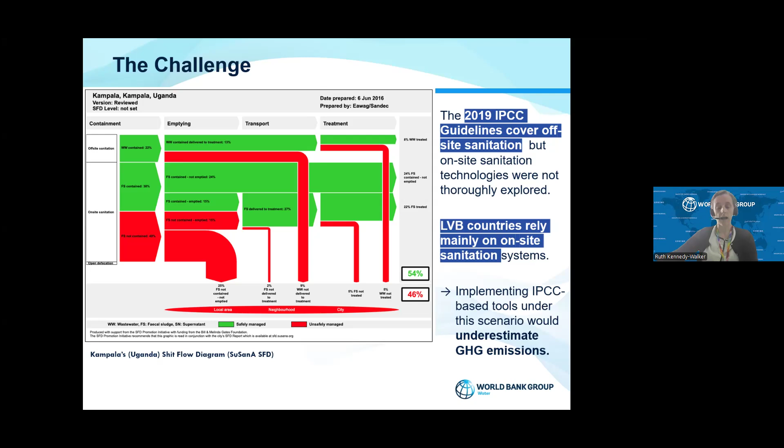So what we found is the current tools were basically underestimating GHG emissions, especially for those countries, like the riparians I mentioned, that are highly reliant on on-site sanitation. Next slide, please. So we wanted to develop our own tool.

So we partnered with a firm called Climate Focus to develop a tool that would obviously rely on the information from IPCC, but also include other data, more recent data, to get a better estimation of GHG emissions across the sanitation service chain and for both on-site and off-site sewage systems.

So we started with the input data. In some of the towns around Lake Victoria, the SFDs were available, which provided data. And then in those that didn't have the SFDs available, we did a rapid assessment. So we actually did a baseline sanitation assessment for 44 settlements to show the current sanitation situation.

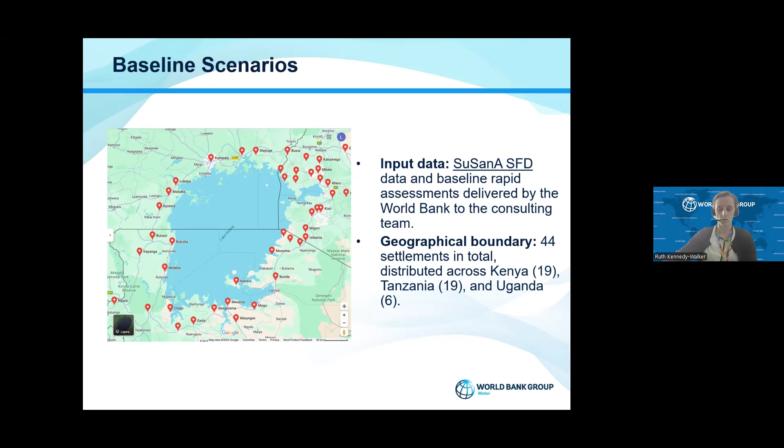Next slide, please. Then we developed the model. So as I mentioned, we built on the 2019 IPCC guidelines, but complemented with more up-to-date peer-reviewed literature. And we were trying to see the categories of emissions you can see from the table there across the sanitation chain and for both on-site sanitation and sewage systems, and both from direct or operational.

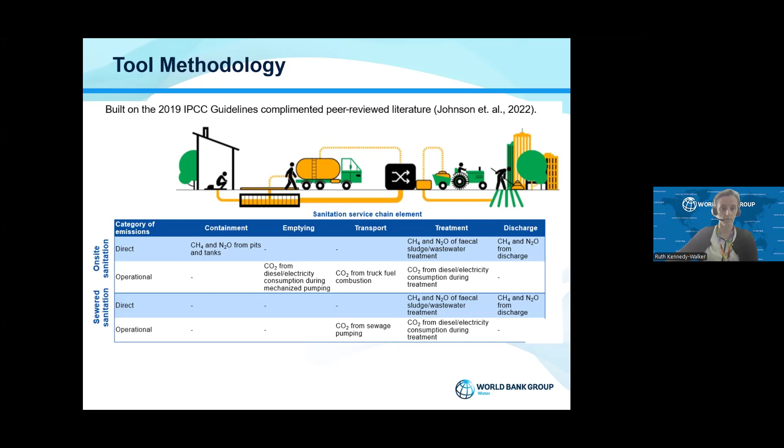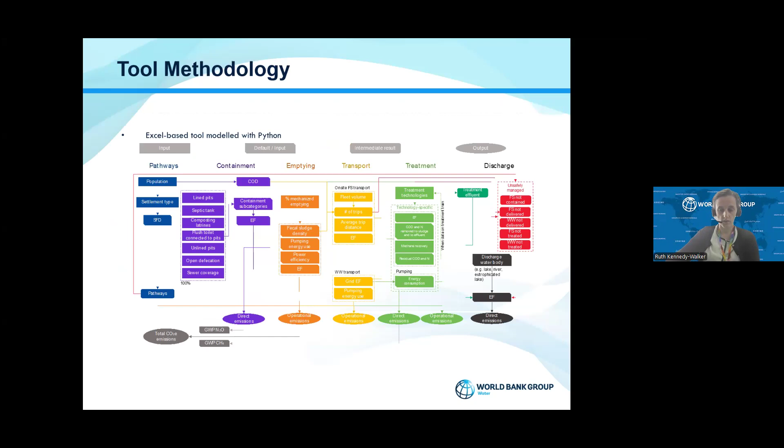Next slide, please. Obviously we have a very short amount of time to discuss, but this is a screenshot from the Excel-based tool model, which is based in Python, and shows you across the different pathways and across the sanitation chain the type of elements that were being looked at to get the GHG profile. Next slide, please.

Sorry, back one, thanks. So then we worked to come up with an output interface on the model, which, this is obviously a snapshot, basically highlights the total emissions across the 44 settlements. It identifies the top emitting settlements, which you can see. Then it looks at where across the sanitation service chain the highest emissions are coming from, and whether it's coming from safely or unsafely managed.

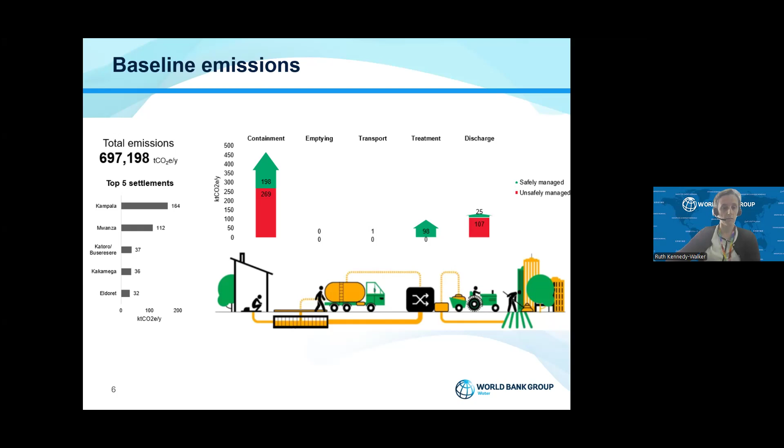And this is obviously the baseline. So this is the current situation. And the idea is to be able to help government counterparts, practitioners, and the World Bank to identify, if greenhouse gas emission reduction is the priority of a project or a key element, where across the sanitation service chain they should be focusing, and maybe even geographical locations.

So as I mentioned, when we started out, we wanted to do the baseline scenario and then also go one step further and input potential future interventions and see how that would impact the GHG profile for each city or across the country as a whole. But unfortunately, we ran out of time and funding to do that. So we ended up just doing the baseline scenario for the 44 settlements.

But I think overall it was still a successful outcome because we were able to get a better estimate of the greenhouse gas emissions using the more recent literature for countries where there's more reliance on on-site sanitation than sewage. The model allows us, as new literature emerges, because there's a lot of research going on at the moment on this, to input those parameters and update the model. As I said, it's a good model to look at the main intervention stages across the sanitation chain.

This was the first development of the model, and we're now looking to utilize the model in a new project in Indonesia. I'll talk a little bit more about that later if I have an opportunity. And we will do the second phase. So the baseline, and then in Indonesia, we'll actually look at how proposed interventions would change the greenhouse gas emission profile, and that will impact the project design and what is actually being constructed, or the service delivery model that is going to be used across the sanitation service chain.

So before I start my presentation, I want to put a question out there. When you think of the toilets that you see in your work, whether they're in rural areas or urban areas, what proportion of them do you think are climate resilient? Is it 50%, 20%, or maybe not any of them are resilient? You can keep that to yourself, but I was asking this because one thing I'd like to get across in this presentation is to get us thinking about what would it take to make a sanitation technology resilient. Next slide, please.

So my colleagues and I at the University of Technology, Sydney, have been thinking about this, and we developed something called the ClimateFIRST tool, which is a 5-step process to help sanitation technology developers think through how to make a sanitation technology more resilient. And before I go any further, I want to highlight that climate resilient sanitation is about much more than technology. It's about institutional arrangements, financing, regulatory frameworks, lots of things. We're not going to just engineer a toilet that will solve for climate change. But technology is an important part of the equation, and that's what we're zooming in on here in this tool.

So the tool itself is an Excel-based process that helps the user think through how different climate-related hazards might affect a particular sanitation technology, and how we can reduce the risk of those hazards through improved technology design. The reason why we might want to do that is, as we know, climate change is heightening the climate risks that technologies are exposed to, and we want toilets to perform better in an era of climate change. The tool can also be helpful in comparing different types of sanitation technologies if you were to do an assessment of two different technologies and then compare them side by side.

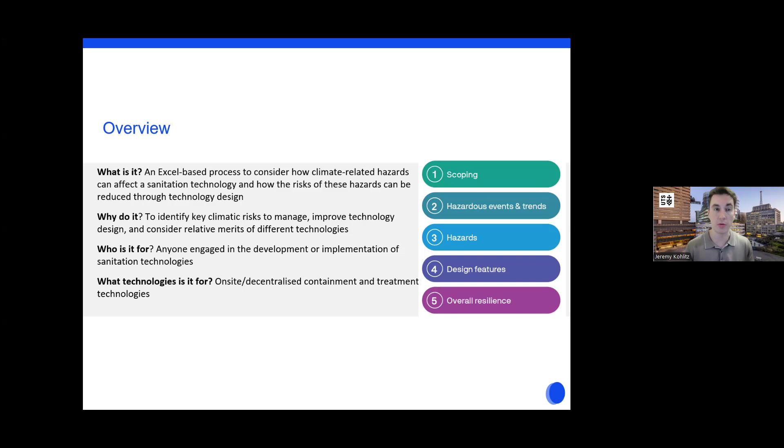So it's for anyone that's involved in the design of sanitation technologies or their implementation. That might be a developer that's coming up with designs or an implementer that's making choices about which ones to implement. And finally, when I say sanitation technologies, I'm referring to non-sewered, on-site, decentralized containment and treatment technologies. So not referring to sewer networks and wastewater treatment facilities. Next slide, please.

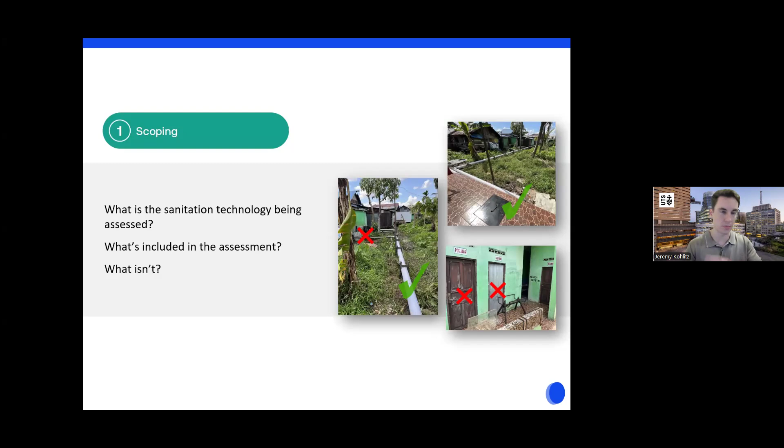So the first step of the tool is to decide what is the sanitation technology that you're assessing. In this example, these are some photos from DEWATS in Indonesia. And you might say, well, we want to assess the containment unit part of the technology, and we want to, for example, assess the main sewer line here. But we don't want to assess all the household connections because maybe we don't have control over that. And maybe we don't want to assess the superstructure because as a developer, I don't have any control over what the community constructs as a superstructure. So I'm excluding that from my assessment. Next slide, please.

The next step then is to decide which hazardous events and trends are relevant for your area. So the ClimateFIRST tool supports an assessment of 8 different hazardous events and trends that you see on your screen. And you might choose that you're just concerned with floods or droughts. Or for example, if you're in a landlocked country, you're probably not too worried about high sea levels. So you would just pick the hazardous events and trends that you think are relevant for your technology.

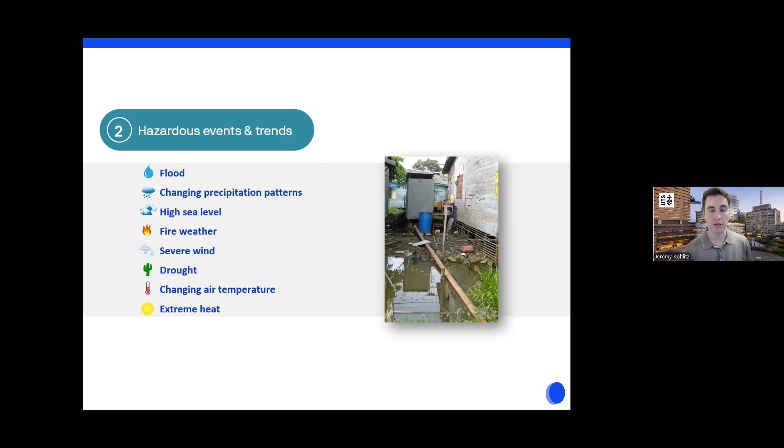Next slide, please. So then the ClimateFIRST tool will take the hazardous events and trends that you selected and display a list of hazards that are associated with those. So for example, I've pulled up a list of the hazards that will come up if you select floods and droughts, which are associated with a range of different things like landslides, erosion, force of floodwaters, and so on.

And at this stage in the assessment, you would assess the extent to which these hazards would affect the sanitation technology you were assessing if it were exposed to that. And the ClimateFIRST tool gives a specific quantitative example of each one of these hazards. And you would say, I would think it would either have a low, medium, or high impact on the technology that I'm looking at. Next slide.

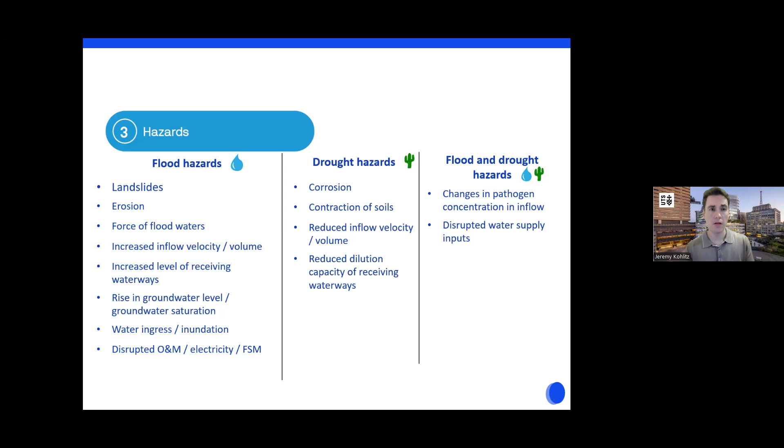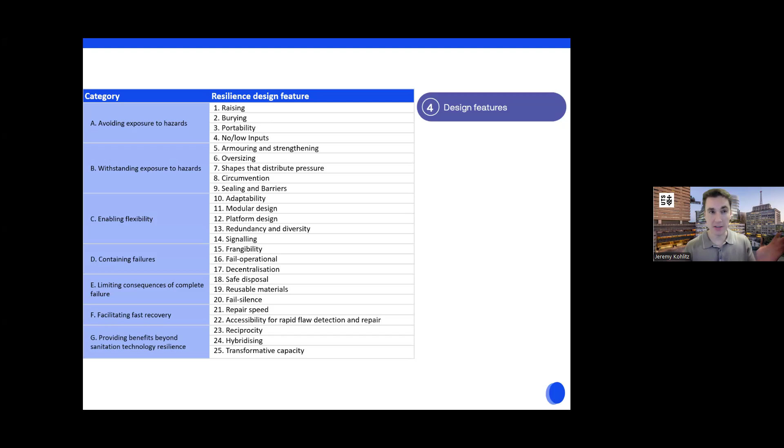So after you've done this sort of assessment of all the specific climate hazards, we then look at the technology itself and consider to what extent does the technology already have resilience design features incorporated that could help offset some of those hazards, or what could you add on to the technology design in order to improve it? So we went through literature and came up with 25 different design features that one could incorporate into a sanitation technology design to make it more resilient. And I don't have time to go through all of them today. I'll just go through a few just to give some examples.

So the first one I think is one that people think about often when we think of sanitation resilience, and it's raising, so just lifting up the technology so the important components of the sanitation technology don't get exposed to something like the floodwaters.

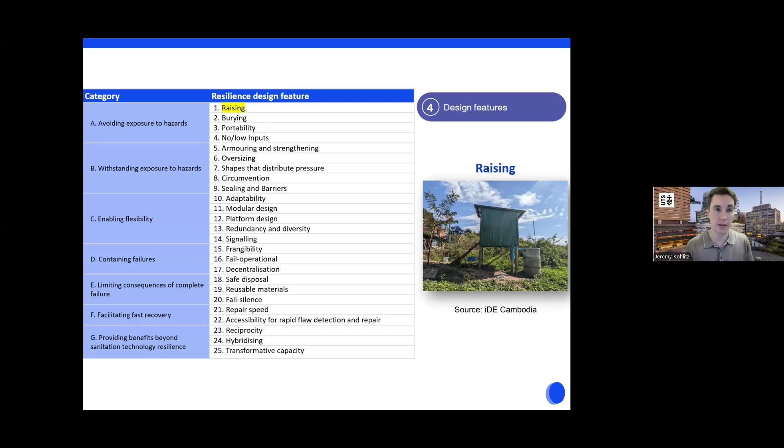A second feature is portability. So if you think of container-based sanitation, you could literally pick up the toilet and move it away from the hazard, the flood or rising sea levels or whatever it is. Container-based sanitation also doesn't really have electricity inputs, it doesn't have water inputs. So there's fewer things that could become exposed in the first place. So that's why these design features fall under the avoiding exposure to hazards category.

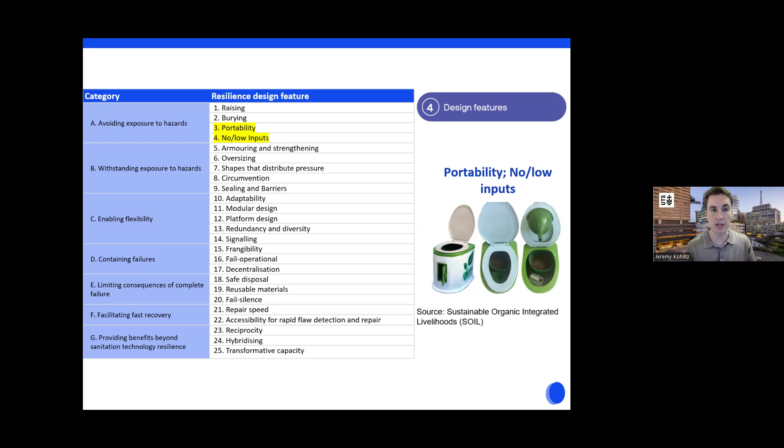The next example is shapes that distribute pressure. So there's a lot of interesting research out there that shows that structures that have cylindrical or spherical or geodesic shapes are less likely to be damaged during hurricanes, cyclones, and floods. So if we construct sanitation structures to have those shapes instead of cube shapes or square shapes, they're likely to withstand the exposure to certain hazards better.

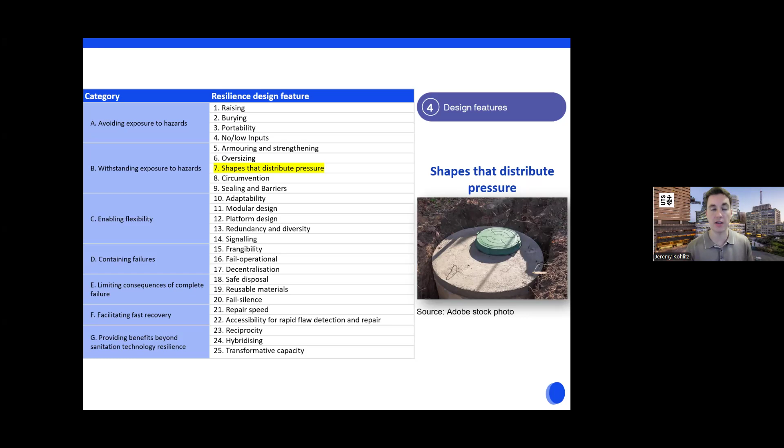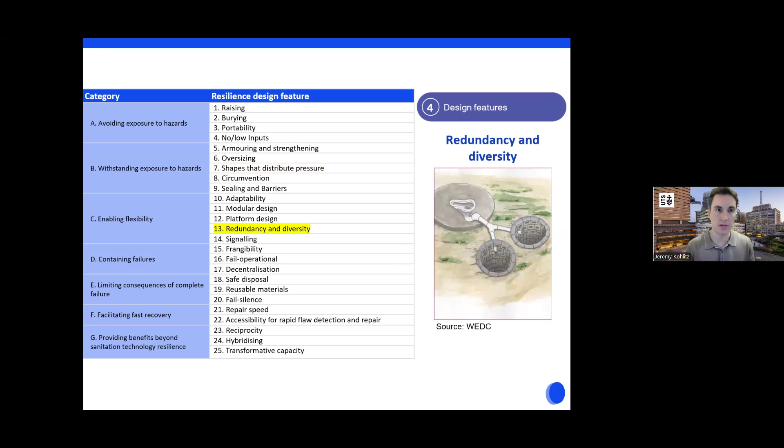Next design feature is redundancy and diversity, which falls under enabling flexibility. This comes up in resilience literature a lot. So for example, a twin pit latrine has 2 pits. In the event that one of those pits collapsed, say during a flood, at least you still have the second pit. People can still continue using the toilet until the first pit gets repaired. So there's redundancy in the containments.

And then finally, I'll skip ahead to the last category, which is about providing benefits beyond sanitation technology resilience. So the design feature of hybridizing refers to technologies that provide a sanitation service, but also provide some other service that helps the community beyond just sanitation. So an example is a biogas toilet. It meets a sanitation need, but also produces biogas, which can be a clean energy source that can help with other aspects of community resilience.

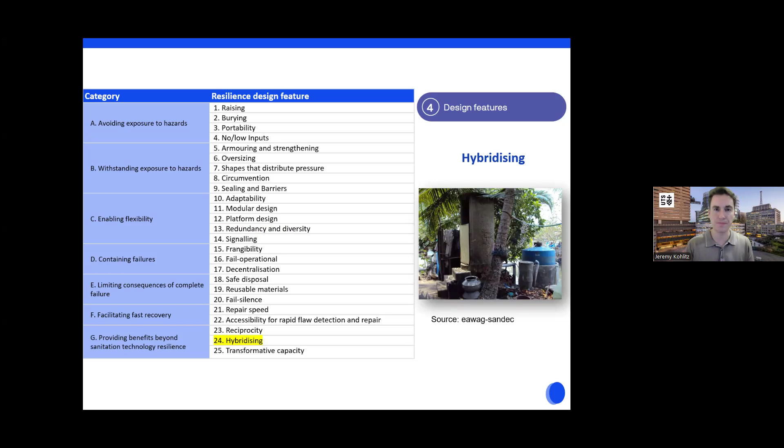So a final point I want to make about these design features is that more is not necessarily better. You don't necessarily want to incorporate all of these 25 design features into a toilet. If you tried, you would come up with a very convoluted and probably very expensive toilet. So it's more about picking which ones would help you deal with the hazards that you assessed in the earlier step.

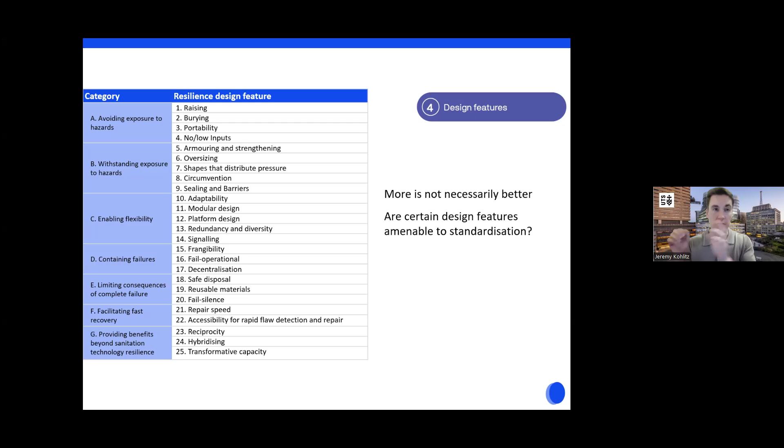I also want to make a quick point about how I think the future of climate resilient sanitation technologies is going towards standardization and professional production of sanitation products. And I think as we move more to more professional designs of sanitation technologies, we can think about how certain resilience design features might fit into a standard climate resilient design.

Finally, on the last step of the process, the ClimateFIRST tool will sort of count all of the hazards in which you said had low, moderate, or high impact, and then it'll calculate a score, low impact, moderate, or high impact based on the proportion of hazards that you said were low, moderate, or high.

And then the user themselves gives the resilience rating of low, medium, or high resilience. So they reflect on what they thought about during the hazard assessment, what they thought about during the resilience design feature assessment, and they make a call on whether they think the technology has low, medium, or high resilience to that particular hazardous event or trend.

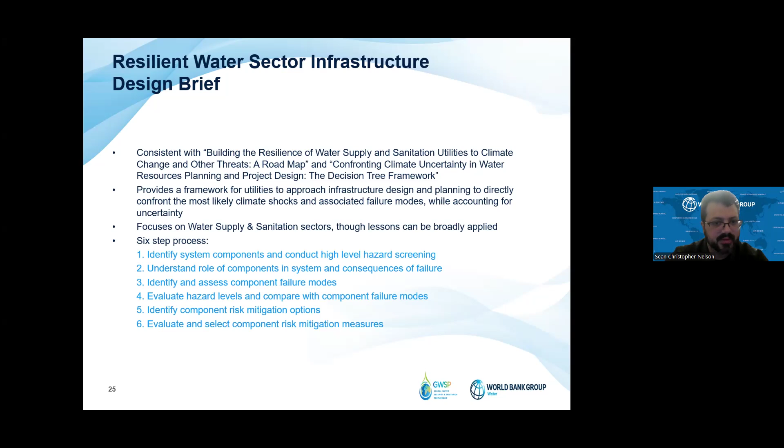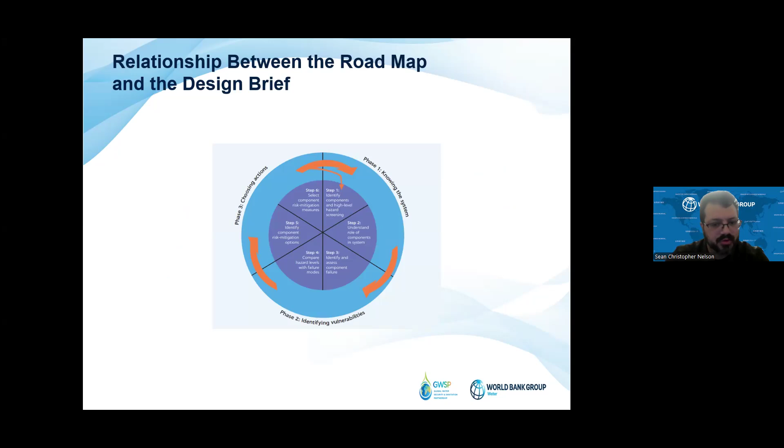And so here we have the 6 steps highlighted and how they correspond with the 3 phases of the roadmap to show that we are iterating on our previous work and making it more refined over time. Next slide.

I can say from my own experience that going to field in places like, say, the dry corridor of Honduras, when planning for projects there, that you can have literally the same neighborhood that will be flooded potentially due to climate change in one part of the year and dealing with a major drought just a few months later within the same calendar year.

This provides a comprehensive framework to help a national government lead a whole of society effort to help mitigate these risks and to carry out contingency planning and understand how that should be integrated into the wider planning context when a government is deciding to invest in infrastructure and creating investment programs. Next slide.